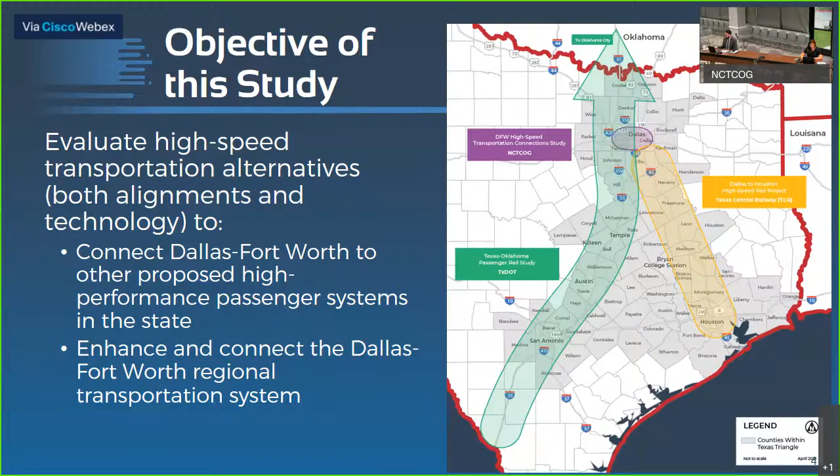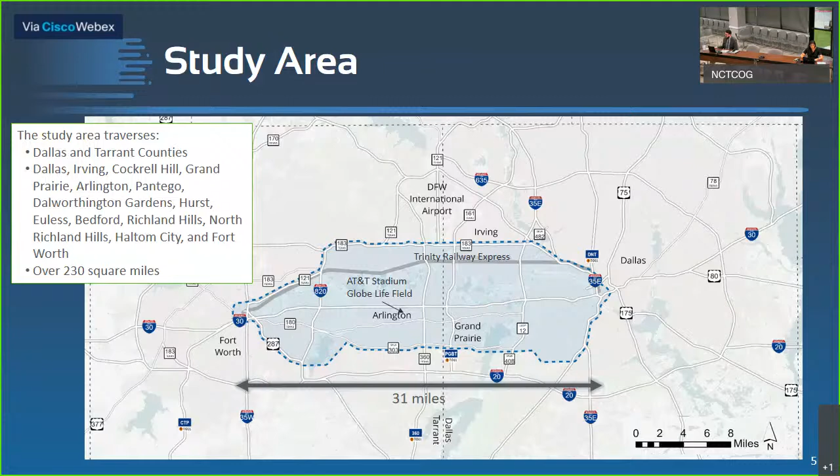The stated objectives will be analyzed in the study area as shown on this map. This area is generally bounded by State Highway 121 and State Highway 183 to the north, Interstate Highway 35E to the east, downtown Fort Worth to the west, and U.S. Highway 287 and State Highway 303 to the south.

The Dallas-Fort Worth High-Speed Transportation Connections Study is divided into two phases. We are currently in phase one. The purpose of the first phase is to analyze all reasonable alternatives regarding alignment and travel technology. This first phase has also included research on existing and emerging high-speed transportation technologies. The second phase will advance recommendations of phase one through an engineering and environmental analysis as prescribed by the National Environmental Policy Act. The second phase will include conceptual and preliminary engineering tasks, as well as financial and project management plans, concluding with a decision by the federal government regarding project next steps.

In phase one, the project team has used a 3-level screening process to pare down the initial vast number of possible options to a select few. The process, as depicted on this graphic, began with identifying all reasonable alternatives. Next, the first level of evaluation for the alternatives determined whether or not the alternative met the project purpose and need. Of the initial 43 alignments and 5 technologies evaluated in level 1, 23 alignments and 4 technologies proceeded to the second level of evaluation.

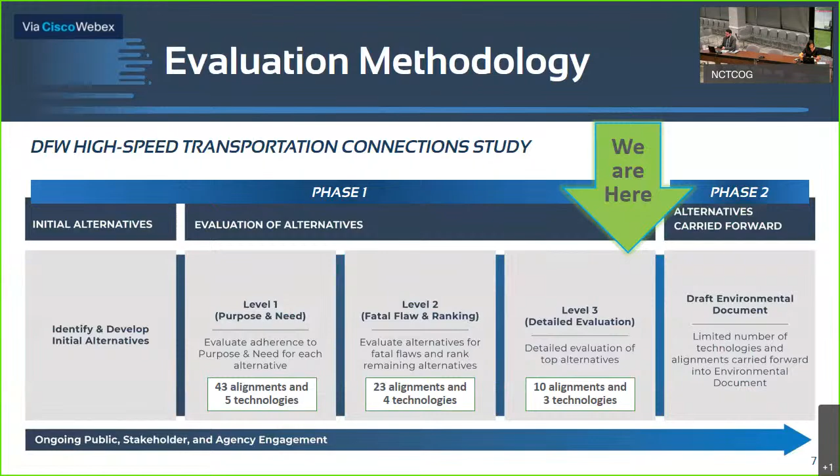Level 2 screening evaluation focused on identifying any fatal flaws which may preclude the alternative from being built. Of these alternatives, 10 alignments and 3 technologies advanced to level 3, which involves a more detailed evaluation of the alternatives. The project team is currently completing this step, and we need your help. As we discuss the preliminary level 3 screening results, please take the time to review the results and provide your thoughts and comments. The information gathered will be very helpful as the project team makes recommendations for a limited number of alternatives to advance to phase 2 of this study.

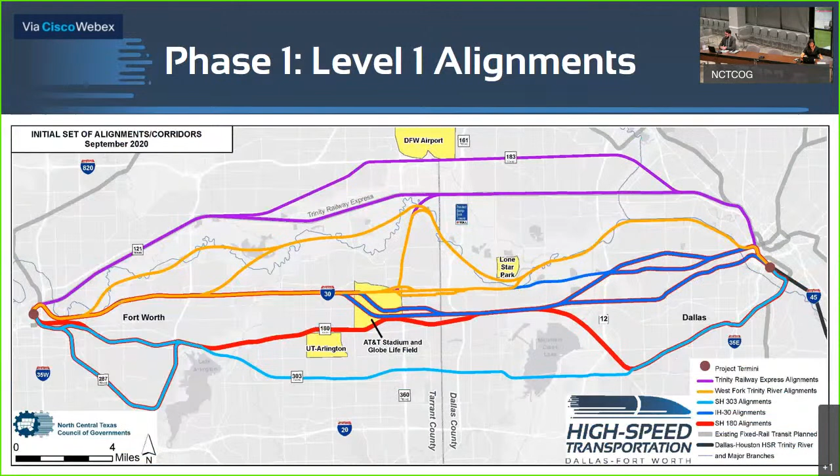The initial 43 distinct alignments and corridors evaluated in the first level of screening were grouped into 5 families of options. These 5 families, shown on this map, are generally identified as the Trinity Railway Express alignments in purple, the Trinity River alignments in gold, the Interstate 30 alignments in dark blue, the State Highway 180 alignments, which are very near the existing Union Pacific Railroad alignment in red, and the State Highway 303 alignments in light blue.

After the fatal flaw evaluation of alignments in level 2, as well as consideration of stakeholder and public input, 10 alignments advanced into the third level of screening, as shown on this map. In this final level of screening, the project team will conduct a more detailed evaluation. Later in the presentation, we will share the detailed criteria used to screen these alternatives along with the draft recommendations resulting from this analysis.

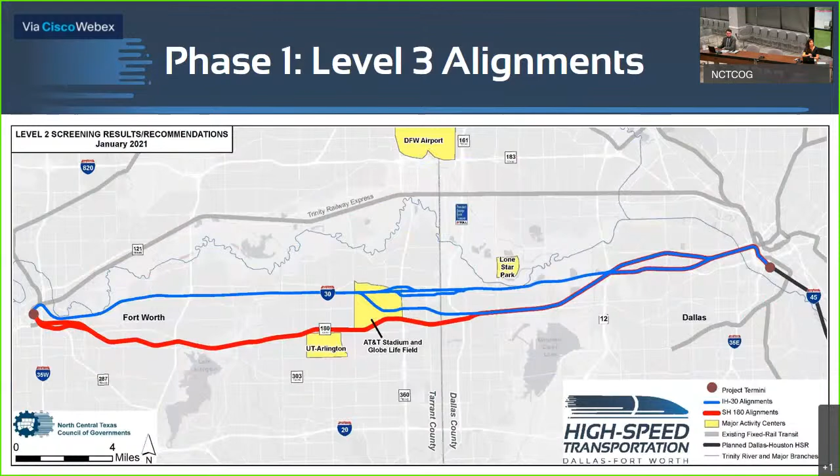On this next slide, you'll see the initial 5 transportation modes or technologies considered for this study, as graphically depicted here. These initial modes of travel include conventional trains, higher speed trains, which are faster than conventional trains but slower than high-speed trains, and high-speed rail trains, which are the passenger trains proposed for the Dallas to Houston system, magnetic levitation, or maglev for short, train technology, and Hyperloop technology, which incorporates a passenger or cargo pod moving in a near vacuum tube. In addition, the project team considered other emerging high-speed transportation technologies.

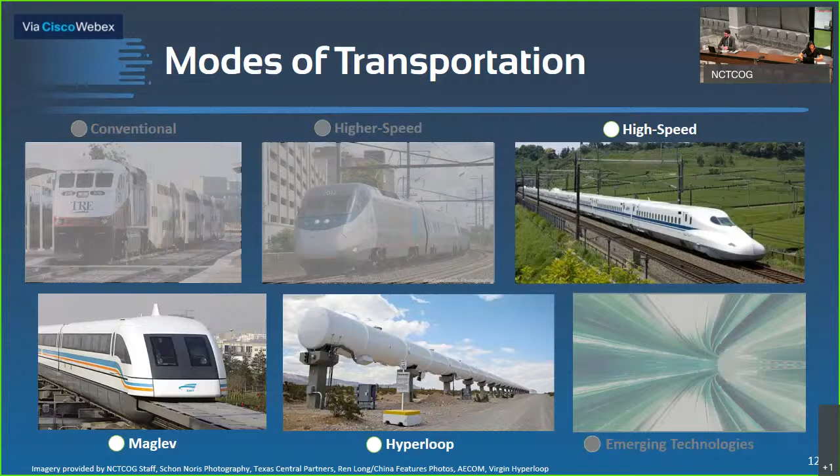Conventional passenger rail was eliminated in level 1 screening, and higher speed trains, along with other emerging high-speed technologies, did not advance beyond level 2. Only high-speed rail, maglev, and Hyperloop technologies advanced to the third level of screening evaluation. We will share our draft recommendations on travel technologies in this presentation. With that, I'll hand it over to Rebecca.

Thank you, Brendan. I'm Rebecca Hernandez with the North Central Texas Council of Governments. Throughout the Dallas-Fort Worth High-Speed Transportation Connections Study, there are many opportunities for the public and governmental agencies to review, comment on, and participate in this study.

There are various types of public and agency engagement strategies used in this study. To date, the project team has held well over 90 meetings and briefings with various partners, stakeholders, international technology experts, and interested parties. 2 series of public meetings have been held for this study, the first being in September 2020 and the second series in January 2021.

Responses to questions and comments from previous public meetings, as well as responses to frequently asked questions, are available on the study website at nctcog.org/DFW-HSTCS. Our engagement strategies have also included meetings with elected officials in the region, and so far, 3 elected officials meetings have been held.

On a monthly basis, the project team meets with the Federal Transit Administration and the Federal Railroad Administration to discuss the study's progress. Frequent technical work group meetings comprised of city staff and transportation agencies within the study area have provided guidance to the study process and recommendations. Other engagement efforts have included a technology forum and meetings with government resource entities and transportation agencies and community organizations.

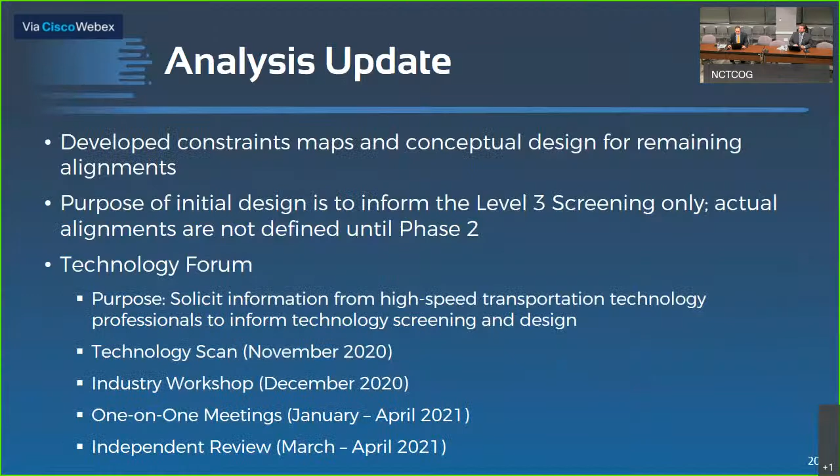As part of the Level 3 screening, the project team considered the following opportunities for alignments along the Interstate Highway 30 corridor between downtown Fort Worth and Cooper Street in Arlington. The Texas Department of Transportation is getting ready to initiate the phase for the ultimate redesign of the highway infrastructure. This presents the opportunity for the high-speed transportation system to be designed in coordination with the highway design, possibly incorporating the high-speed transportation corridor within the footprint of the highway infrastructure as an integrated transportation corridor. Alternatively, the high-speed transportation system could be designed along the periphery of the interstate highway to minimize potential conflicts with highway main lanes.

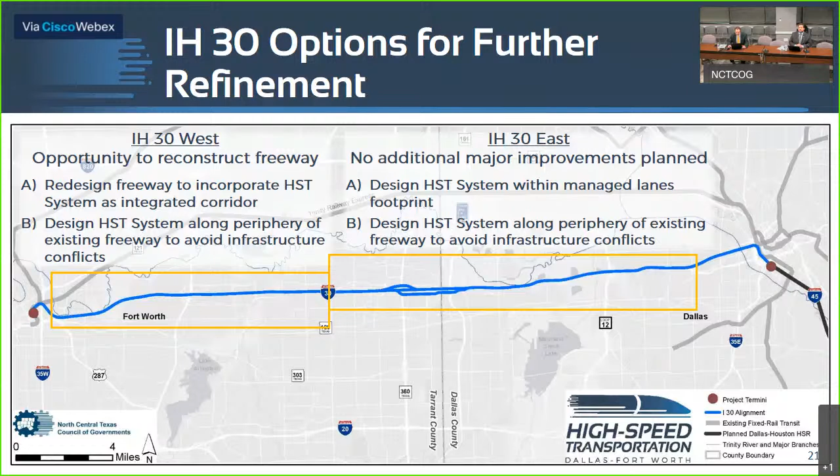For the section of Interstate Highway 30 between Cooper Street in Arlington and downtown Dallas, the highway main lanes and frontage road system have already been substantially improved to the ultimate configuration. In this case, the high-speed system could also be designed along the periphery of the interstate highway to avoid the existing freeway infrastructure. Are there other opportunities that the project team could explore in this section? One such consideration is potentially replacing the managed lanes in the center of the highway with this high-speed transportation system. The project team is considering all of these options. We continue to work closely with the Texas Department of Transportation to refine the preliminary alignment concepts prior to starting the next level of preliminary design in Phase 2.

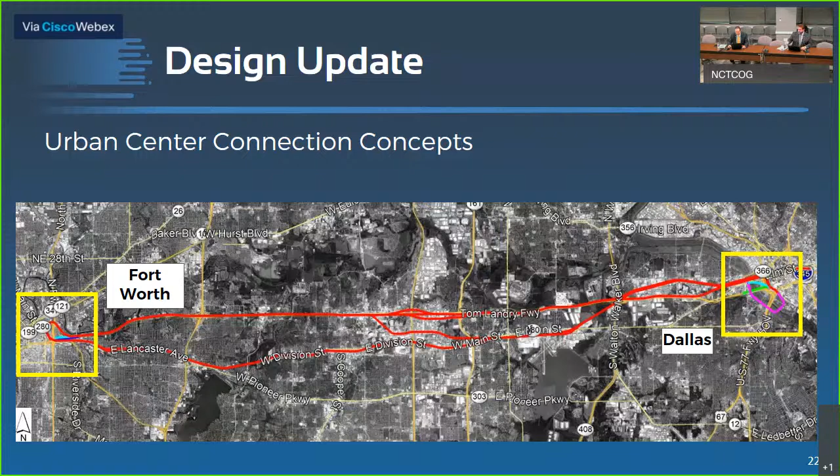To supplement the Level 3 alternative screening evaluation process, the project team began looking at how each of these alignments could connect to the urban areas of downtown Fort Worth and downtown Dallas. These urban center connection concepts were developed independent of the level 3 alignments because of the complex nature of the dense existing and planned infrastructure surrounding each of the downtown areas. As stated previously, these urban center connection concepts are independent of the alignment alternatives and can be adjusted to facilitate connection to any of the level 3 alternatives that are recommended for advancement into phase 2.

We're seeking feedback on other ideas for ways to connect to the urban centers. Please share your thoughts with us. The project team has developed a list of pros and cons for the current connection options, which will be further refined in the next phase.

These graphics show the preliminary urban connection concepts for both downtown Fort Worth on the left and downtown Dallas on the right. Fort Worth Central Station, noted on the graphic, is identified as a preferred location for a high-speed transportation station. Each of the different colored lines represent connection options between this station and the level 3 alignments. An additional station location for consideration at the northeast corner of the intersection between Interstate Highways 30 and 35 West is also shown, and that might provide a better connection to a future high-speed facility headed south out of Fort Worth. The proposed high-speed rail station from the planned Houston to Dallas project is also shown in the graphic to the right, the Dallas graphic.

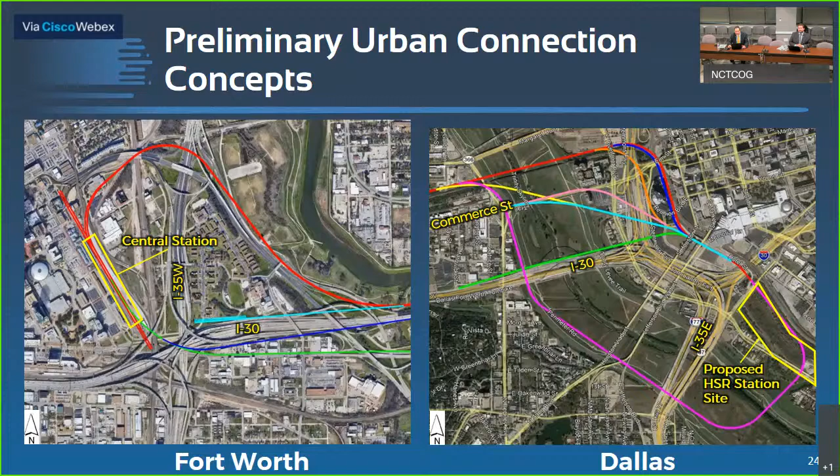In phase 2, the project team will evaluate the effects these urban center connections have upon existing or planned infrastructure and developments. We'll also be looking at environmental considerations, including visual and noise impacts, as well as effects on project costs. Economic development opportunities around high-speed transportation stations will also be considered.

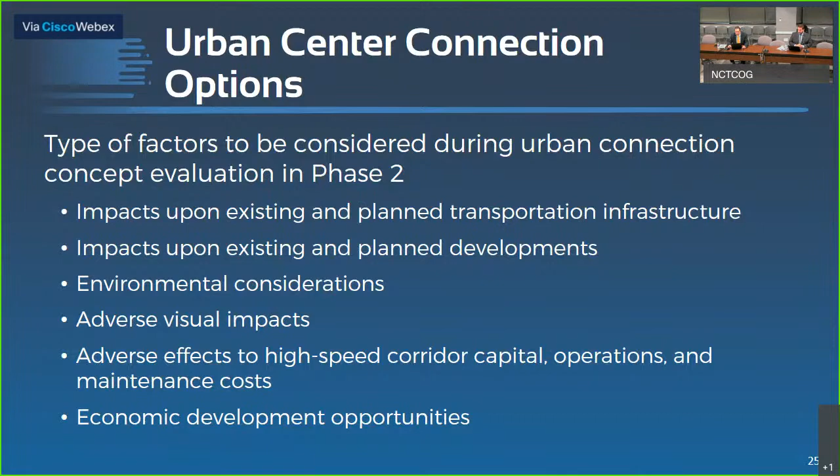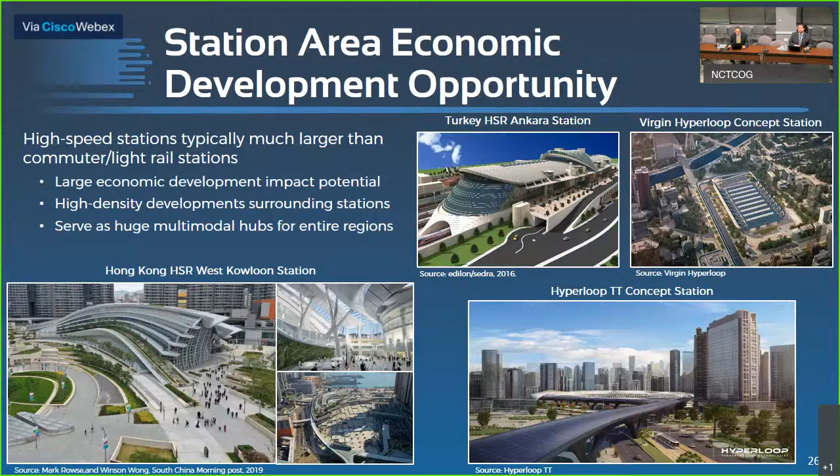The stations anticipated for this high-speed system are not the same as the canopy and platform footprints of passenger rail systems that we're familiar with locally. High-speed transportation stations are typically larger structures that serve a regional multimodal transportation hub for passengers from large population centers, similar to a regional airport. With many examples around the world of attracting high-density development, these stations are expected to have significant economic development impact potential. Examples of existing stations and planned concepts around the world are shown here. The current concept for the Dallas-Fort Worth High-Speed Transportation Connections project includes 3 stations, 1 at each terminus, Dallas and Fort Worth, and 1 in the vicinity of the corridor midpoint.

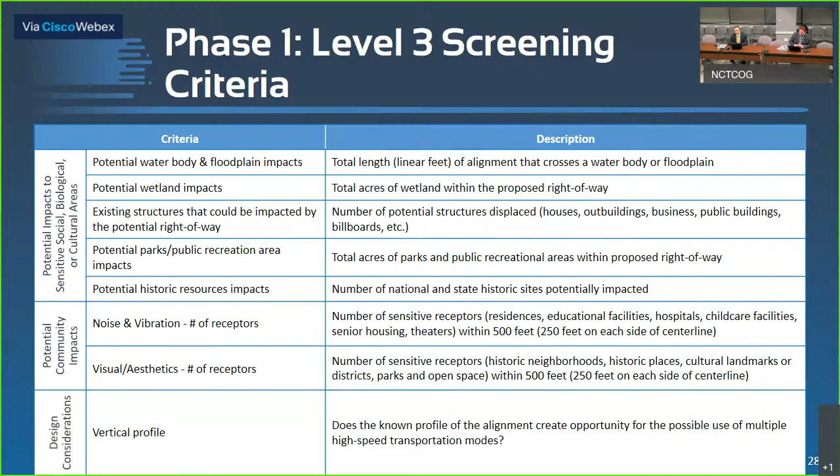The final three major criteria considered in Level 3 are constructability, cost, and operations. Constructability and operability were separated into 8 different categories, including the need for additional right-of-way, impact to transportation systems (both positive or negative), technology maturity, and impacts during construction.

The project team developed order-of-magnitude construction costs for this project for the purposes of comparing alternatives. Operations were also divided into categories. These included total travel time, along with capability of technologies to accommodate steep grades and sharp curves, which gives flexibility in designing the system. Each category was assessed for the remaining alternatives. Pause again for you to review the criteria and the descriptions.

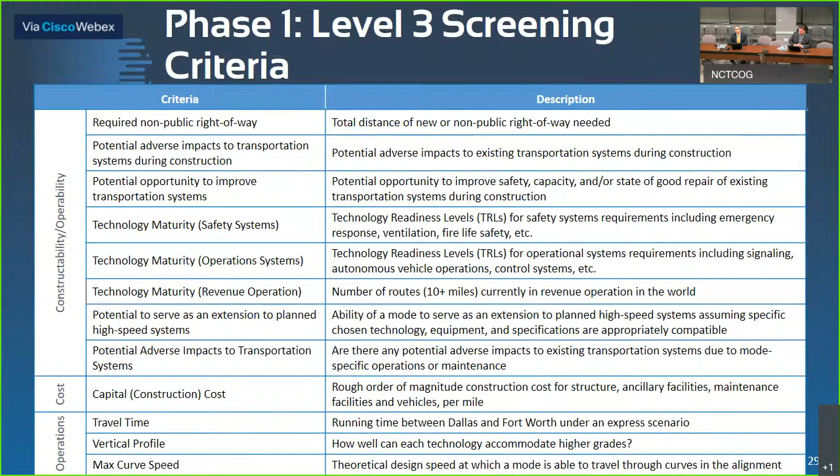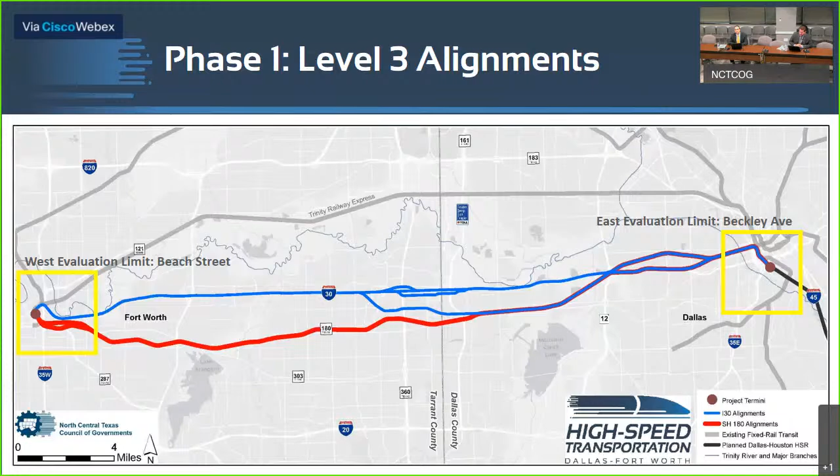Based on the Level 3 screening ratings for each alignment alternative, the 3 highest ranked alignments were along the Interstate Highway 30 corridor. These alignments had the fewest impacts to structures and parks, the lowest potential for noise and vibration impacts, and the least potential adverse impacts to existing transportation infrastructure. Because these alignments hugged or could be within the interstate highway for most of the distance between the two downtowns, they potentially require the least amount of additional right-of-way. With these results, the project team is recommending these interstate highway alignments advance into Phase 2 of the study.

These recommended alignments are shown in the graphic on this slide. For a majority of the distance between Fort Worth and Dallas, these alignments follow the same path. From west to east, all 3 alignments follow Interstate Highway 30 from Beach Street into Arlington.

At this point, the alignments diverge to find different ways to navigate past the highway interchanges of State Highway 360 and President George Bush Turnpike. All 3 alignments converge once again in Grand Prairie, heading east along I-30 into the city of Dallas.

The alignments leave the Interstate Highway corridor near Northampton Road to follow a path similar to the Union Pacific Railroad alignment as it approaches the Trinity River near Beckley Avenue. There's an opportunity for the alignment to be located on either the north or south side of the Union Pacific Railroad in this location. I'll pause again for a moment for you to review these draft alignment recommendations.

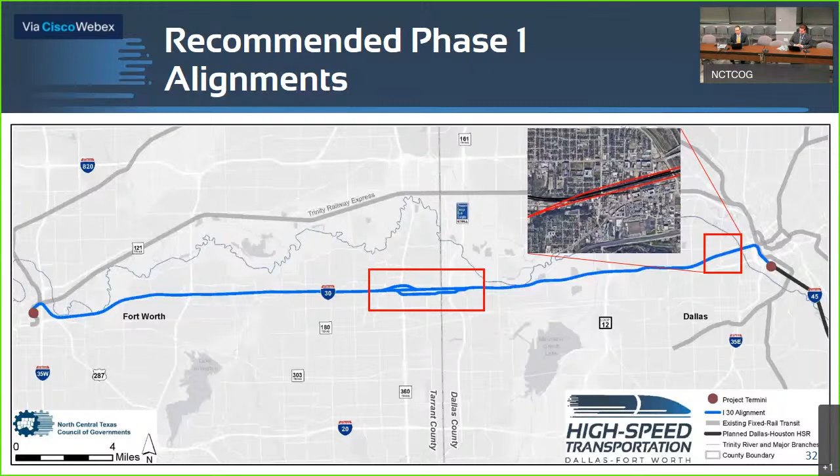For the transportation technologies or modes, the modes with the highest ratings were high-speed rail and Hyperloop. While high-speed rail ranked well across all technology maturity criteria, Hyperloop technology ranked well in the operational criteria, including fastest travel time. Of the 3 modes considered in this final screening level, maglev had the lowest ranking due in part to its high construction cost compared to the other 2 technologies.

Based on these results, the project team is recommending both high-speed rail and Hyperloop advance into Phase 2 of the study. The next 3 slides provide further reasoning to include both high-speed rail and Hyperloop in the second phase.

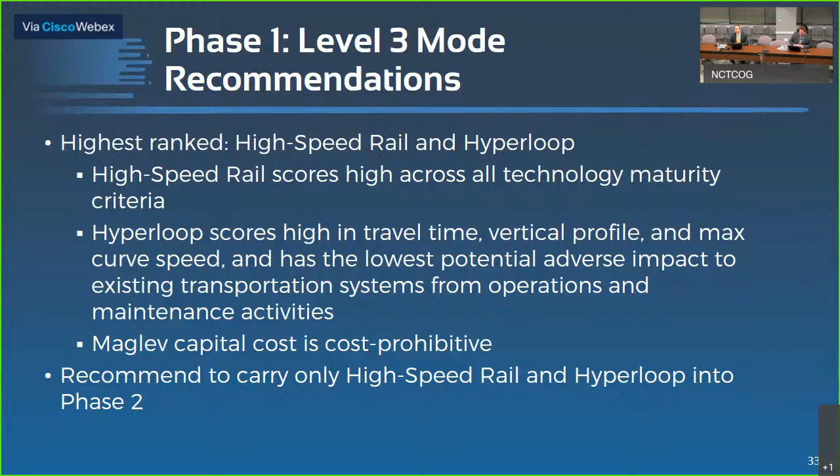The project team applied the Technology Readiness Levels, or TRL, evaluation standard from NASA to compare technologies and determine their relative maturity. This provides a basis to compare emerging technologies such as Hyperloop with proven technologies such as high-speed rail, which has been in operation for over 50 years in other parts of the world. The project team determined that Hyperloop technology is still in the developmental stage at a TRL of 6, with high-speed rail having several thousand miles of track being at a TRL of 9 in the implementation category.

As Hyperloop technology is advancing rapidly, the project team is recommending to advance both the proven technology of high-speed rail and the evolving Hyperloop technology into phase 2. This creates the opportunity for Hyperloop technology to continue to develop over the next 2 years of this study. This project will benefit from having either technology as an option once phase 2 is complete. Should Hyperloop technology not develop as quickly as expected, high-speed rail will still be a viable technology for the corridor.

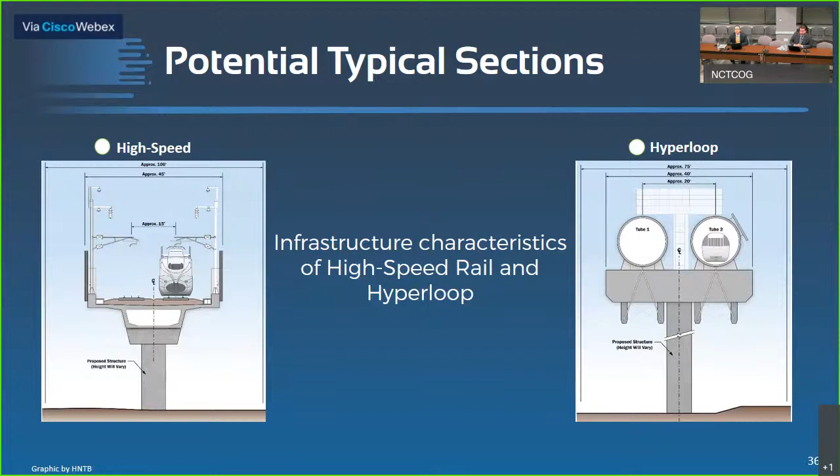Now that you've seen the evaluation process and phase 1 draft recommendations, we'd like to walk you through the next steps of this study. As Rebecca mentioned, we will accept public comments on the phase 1 draft recommendations through June 18th, 2021. The project team will continue coordinating with the Federal Transit Administration, Federal Railroad Administration, cities, transportation providers, and federal and state resource agencies. On July 8th, 2021, the project team anticipates requesting approval of the phase 1 recommendations by the Regional Transportation Council, pending input from the public and local stakeholders.

Please be sure to contact us if you'd like a presentation of this high-speed transportation connection study to your group or organization. We're targeting our outreach to community groups in the remaining level 3 screening alignment corridors. We also plan to hold in-person events this summer as safety protocols allow, so please stay tuned as details are finalized.

In late summer or early fall of this year, we anticipate initiating phase 2 activities. During this phase, the environmental analysis and documentation will be conducted in accordance with the National Environmental Policy Act, while continuing public and stakeholder outreach and engagement throughout phase 2. The project team will also be developing preliminary engineering as well as financial and project management plans.